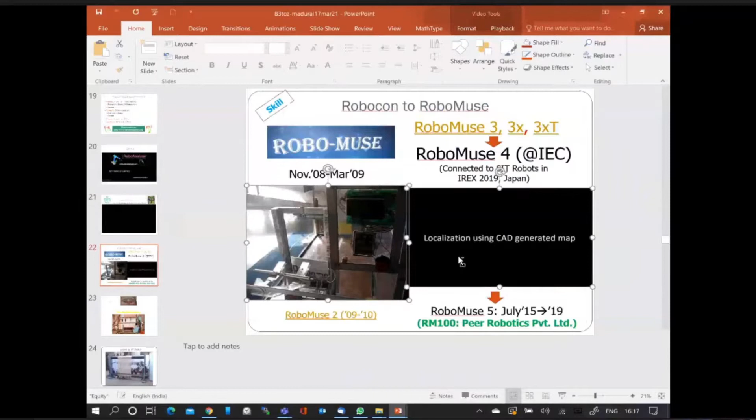These videos, things will not be interesting. This, I save it. This, okay, this one more. That's it. Yeah. Save.

Okay, done. Screen is visible. Am I right, Chetal? Yes, sir. Okay, Rajan, you are. I'm ready. Okay, so let's start. Good evening, everyone.

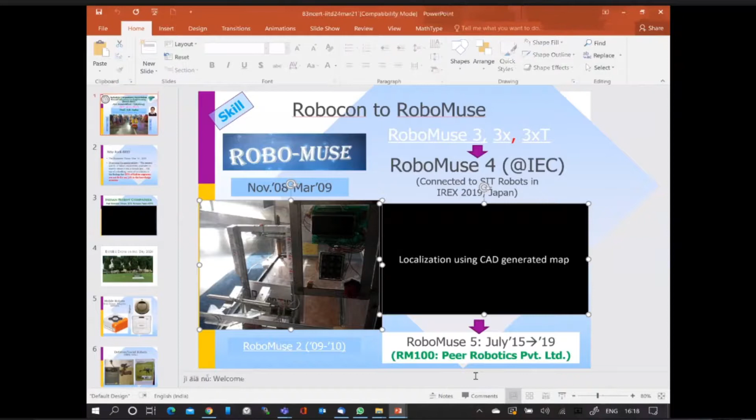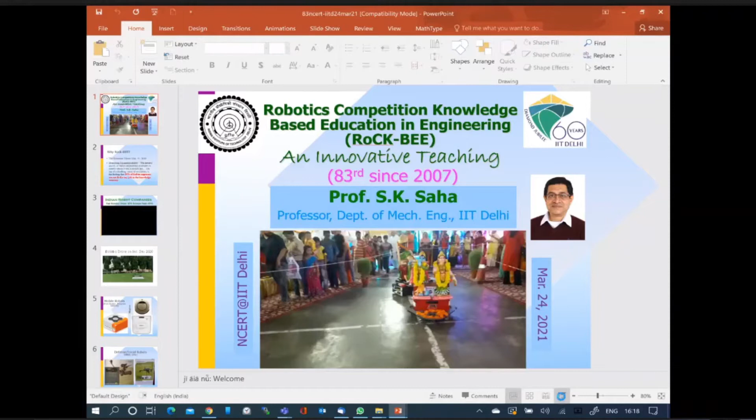Thank you, Rajan, and thanks for this opportunity. Thank you, all the students. I've been told that you are class 12, so you must be aspiring for JEE to come to us next year. But more than that, something I wanted to share with you: even in school, if you can make your studies more interesting—and in these next 20-25 minutes, I will try to explain how things can be made interesting.

My title is Robotic Competition Knowledge Based Education in Engineering. That means how you can take part in robotics competitions and have fun while learning at the same time. I call it innovative teaching approaches, whereas our conventional teaching approaches are the blackboard, whiteboard, LCD projectors, studying before the exam day and vomiting it in the exam papers the next day to get some grades. That's not a nice way of learning in my opinion.

So first I wanted to show you two robots which were built by our students over several years, and we put them on display during the Janmashtami festival of IIT Delhi in 2019. Just watch the first video.

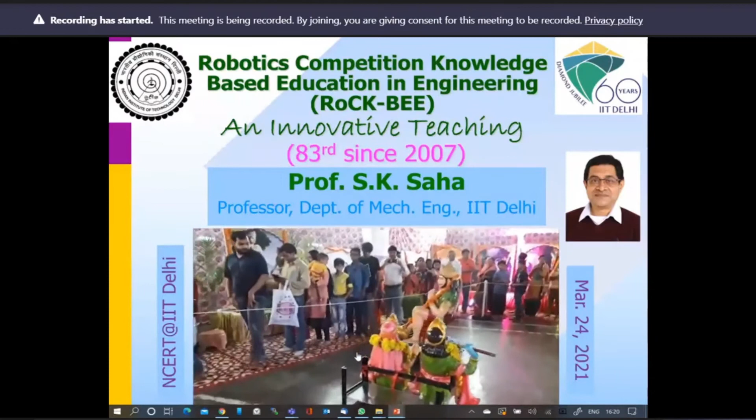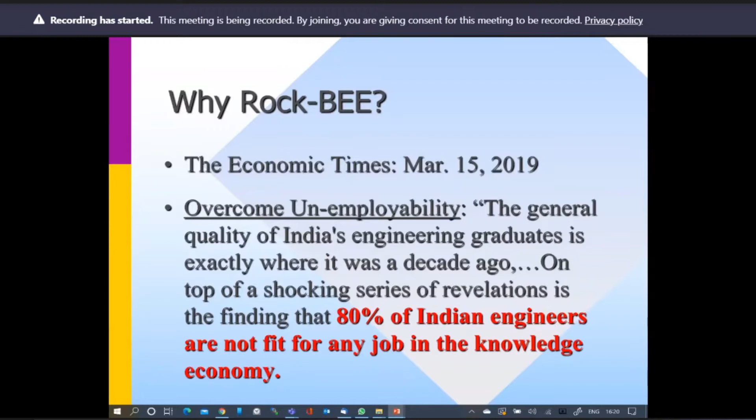You could see how well it pulled the crowd, and the basic purpose of this demonstration to the campus community here was twofold. One fold is whatever our students are doing—how reliable and robust are they? Do they get scared looking at the people? Actually, it is more than scared. If it is working for 5 hours, 10 hours, whether it will go bad or not.

That's one. The second thing is for the campus community—they would know that okay, if IIT is the premier institute and is doing so much advanced technology, which are those technologies, can I see them? So we wanted to bring it in front of them. In short, I call it RoCK-BEE—an innovative teaching concept.

And the purpose, I repeatedly tell these aspects—as you have seen, since 2007, almost 15 years ago, I started this series. And the reason is to overcome unemployability.

If you read this Economic Times, you can also see it in Google after my lecture: the general quality of India's engineering graduates is exactly where it was a decade ago. On top of that, a shocking revelation is the finding that 80% of Indian engineers are not fit for any job in the knowledge economy.

Now, India being one of the youngest countries in the world, if their engineers are not fit for jobs, then what will they do? So they will do lots of bad things. So we need to protect society from those.

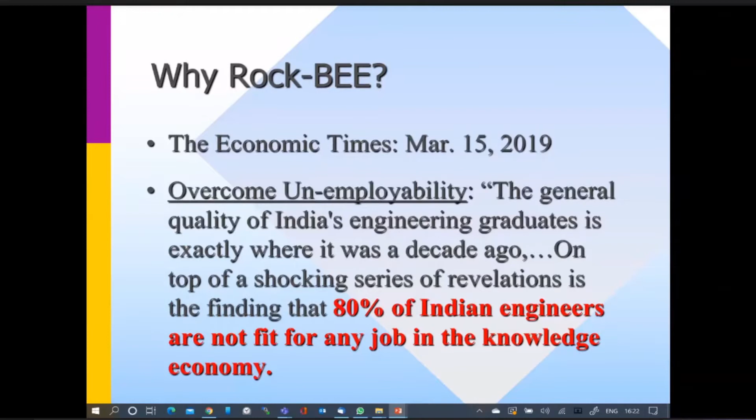So if, in my opinion, teaching has been made interesting by hands-on experiences, then even if they're bored with the job, they can always start a company on their own. So the first few slides will be full of Indian robot companies, because in India we are very fond of foreign products.

If I ask this question to all the students listening to me—what mobile do you use, is it made by an Indian company? Which car do your parents use, is it made by an Indian company? What refrigerator do you use at home, is it made by an Indian company? No—so most of the things you'll see, you buy foreign products, right?

Similarly, for Indian robot companies—because I know that if you want to know about robots, you will talk about Boston Dynamics, dancing robots and stuff like that, no? So we know everything other than ourselves. So here is an attempt to show some of the Indian companies.

Peer Robotics is a company started by our student, and the robot you'll just see is based on a competition IIT Delhi has been participating in, through a BTech final year project.

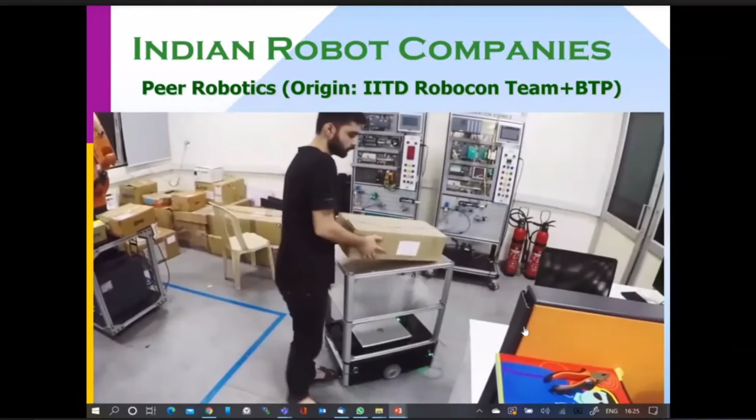So what you watched has 2-3 key points. One, it avoided obstacles on its own, that was autonomous mode, meaning the program was automatically getting executed. Second, it went to a station and stopped, and after that it expected interaction mode.

That means somebody gives some signal, presses a switch or something like that. You saw the student picking up a box, and after picking it up, giving a little push. That push indicated intention to the robot, the motors turned on and it started turning. At the end, when there was no activity around the robot, it came back to the original station.

All these things are done using what are called sensors, various sensors, and then the actuators, which are basically the motors. That was called collaborative robots.

A robot otherwise would be considered an autonomous robot, meaning once you do the programming, until the task ends no other action needs to be done. But here, during task execution, you can come and intervene. That's why it is called collaborative robots, and such robots are very much needed for the country because we don't have to displace human beings from the job. So collaborative robots are very important for the country.

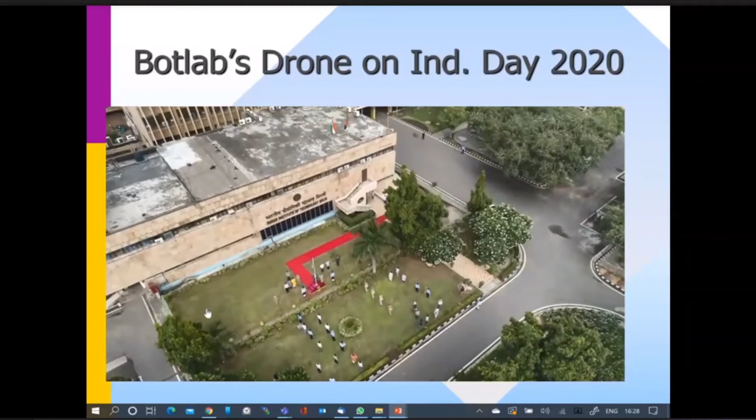What you saw is called the drone, another name is quadrotor because it has 4 rotors. Rotor means rotating shaft, so 4 blades rotating create what we call the lift force, so it can go up just like a helicopter, using similar principles.

Some more robot companies in the country: Grey Orange is very famous. When you order books on Amazon or Flipkart, a mobile robot like this is by Grey Orange. They go to different racks, read barcodes, and give the packet to the counter for dispatch.

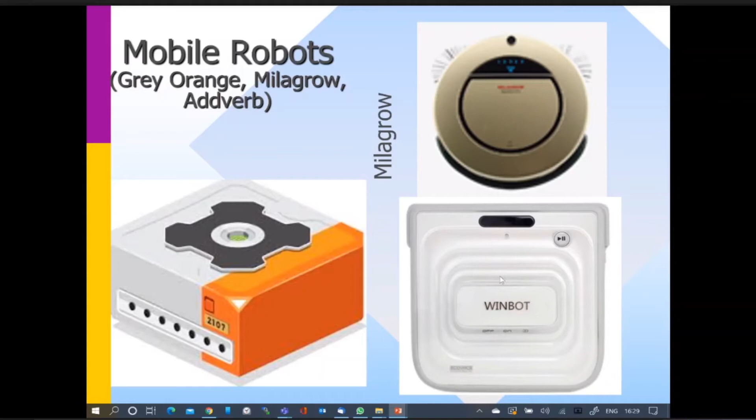Milagrow company makes a floor cleaning robot now for your mom, and this is a window cleaning robot for cleaning window panels in big high-rise offices.

There are defense robots too. For example, this is a bomb disposal robot made by the Defense Robotics Laboratory in Pune.

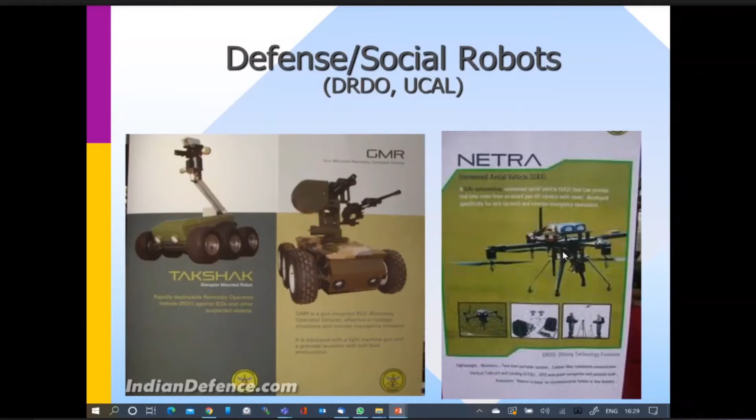This is another flying robot similar to the drone video you just saw. This company was created by students from IIT Bombay, and their first robot was shown in the 3 Idiots movie. The company's name is ideaForge.

These are called industrial robots, used in industry to pick and place certain objects. As you can see, some object is picked up and placed, or it does some welding job. This company's name is MTAB.

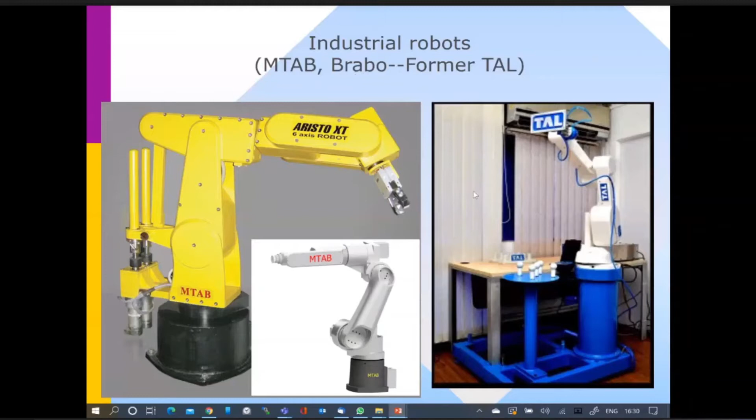It's a Chennai-based company, earlier called TAL. Now they call it Brabo. This is by the Tata Group.

There are other varieties of robots. As you can see, this is what we call a parallel robot, even though this platform is not exactly parallel, but somewhat parallel. These are called the legs, which push up and down at this edge, and the whole platform can take any rotation or translation. Flight simulators are based on similar principles.

This is by a company called Nugenix in Maharashtra, and the concept was developed by one of my ex-PhD students, who is now a faculty at ISM Dhanbad, which is also an IIT at present.

This is a walking robot made by another defense laboratory in Bengaluru, called the Center for Artificial Intelligence and Robotics.

This is an underwater robot, an autonomous underwater vehicle developed by the Central Mechanical Engineering Research Institute in Durgapur. It can go to 150 meters under the sea level, under the water level. The purpose of such a robot is to find out sea life, what kind of animal, and some resources if they're there. If some accident happens, it can find out what is stuck. This is another robot made by another company in Bengaluru, Systematics India Limited.

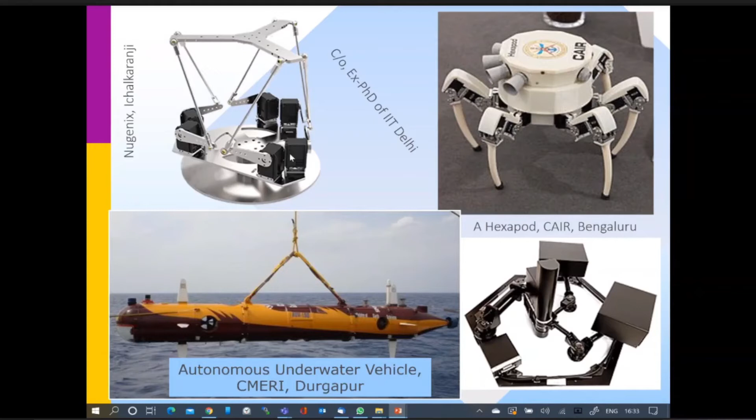Then dynamics, that means the relationship between force and motion. If you give this motion and want to move at a certain speed and acceleration, how much torque needs to be provided by the motor? That is the second part, dynamics.

Control means that any motion you provide to achieve a certain task will not just achieve itself - just like your parents controlling you. If they ask you to write a paragraph, you will write only half and say, oh, I'm done. So parents have to check whether you've done it or not, and apply more pressure. Similarly, the robot's controller does the same thing.

The last part is simulation and animation - without designing or building a robot, can you predict its behavior? During my session, after my lecture, there will be a real demo of a robot, and after that one student, Hetal, will show you a simulation. He has not built that robot, but he will show how a mobile robot used in a hospital environment can be simulated. That gives a good idea about how to plan.

Now, to study kinematics and dynamics, we have created software called RoboAnalyzer, which is free software. You can download it from www.roboanalyzer.com, and it lets you build your own robot.

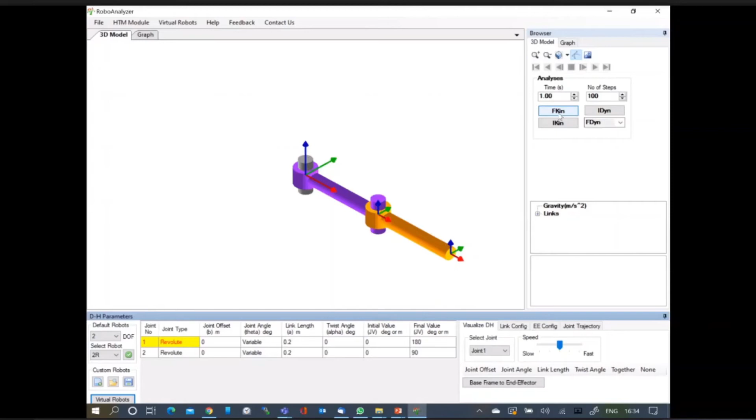For example, this is your arm, upper arm and lower arm, with some arbitrary values you can play with. Then you set the joint values - this is called a joint, this is called a joint - so move 0 to 180 degrees and 0 to 90 degrees, meaning this value ranges 0 to 180 and this one 0 to 90. Then I press something called the FKin, and once that's done, if you say animate, this is the way it moves. So you can build it and see what happens.

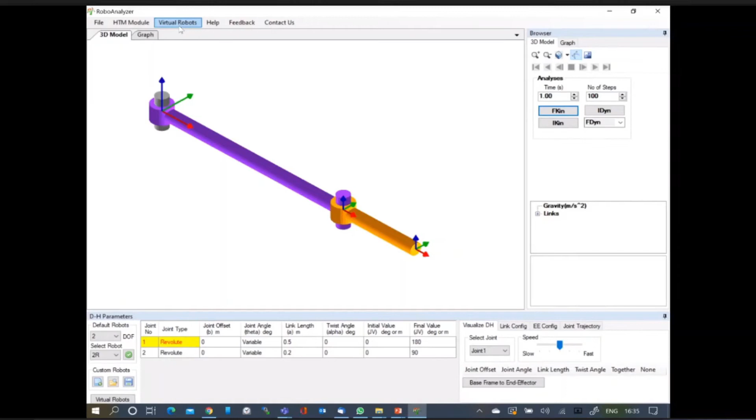So with values like 0.2 or 0.5, this arm got longer. That way one can play with many things, and there's something called virtual robot. The virtual robot feature is interesting because it shows about 16 or 17 industrially available robots. You can choose which robot you want, and then move it as if using a small box controller, like you do with toys - it's a virtual toy for you in a way.

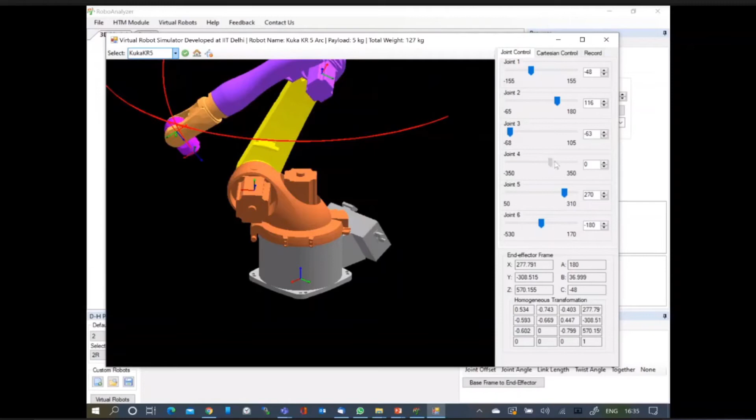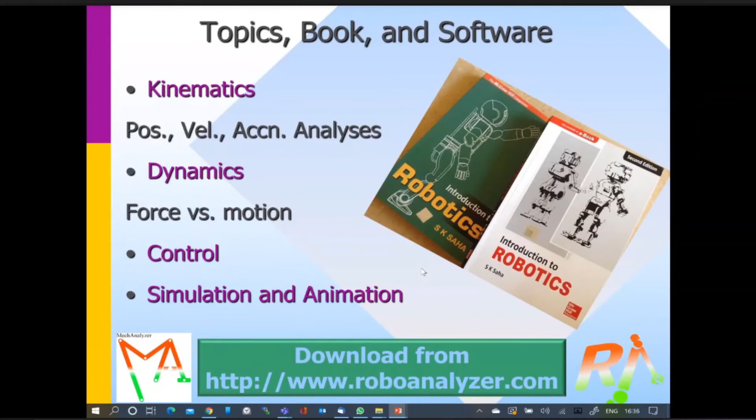Once you go to a higher level of studies, you will understand these things better. Now this is for robot structures, but there is something called MechAnalyzer, for mechanisms. All the machines you see in real life use some kind of mechanism like this - there are several examples, but let's look at some common ones you will find.

For example, there's the steering mechanism - in a car there is a steering mechanism, so you can play with how the car mechanism functions. You move the front wheel and see how things move. Then there's the wiper mechanism in your car - you have a wiper mechanism and can see how it functions.

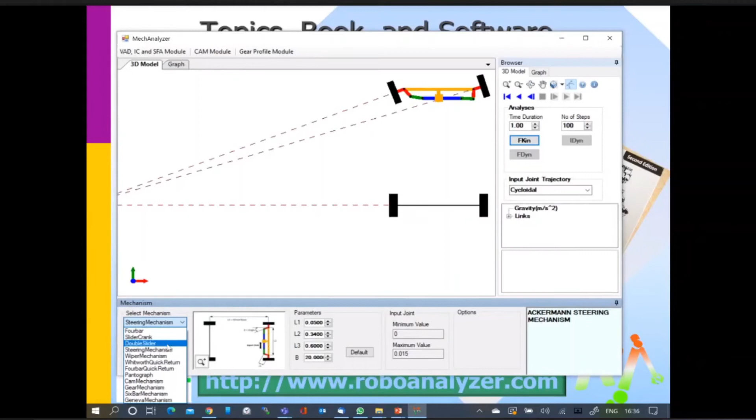Then you can go to the wiper mechanism in your car - you have a wiper mechanism and can see how it functions.

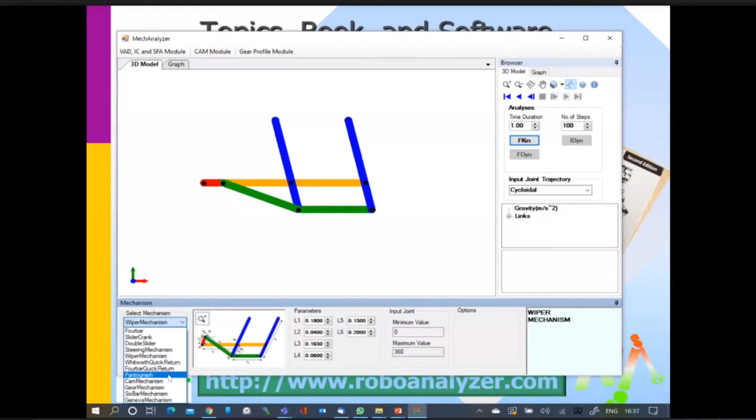These are examples mostly taught to undergraduate mechanical engineering students in a course called Theory of Machines. But some things, like the gear mechanism - when you start building a robot, even at school level, you come across using gears. So here you see how the gear mechanism works, and you can change some of the parameters.

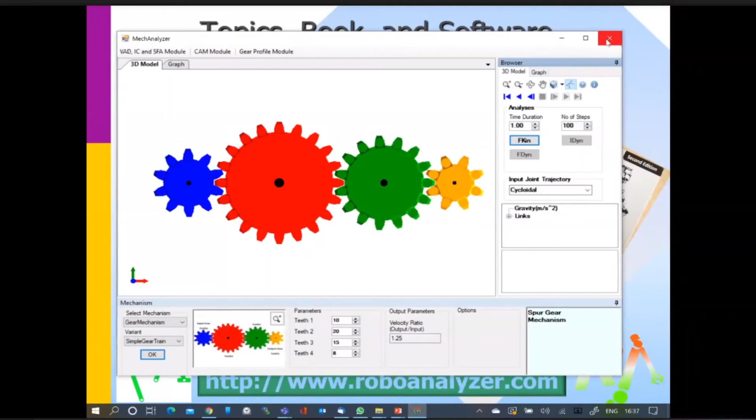There may be many such tools available on the internet, but I wanted to give you pride, to help you become proud Indians, so that you use more Indian goods, Indian software, Indian books, and so on.

Now I wanted to introduce a competition by participating in which you learn many things. This is called Robocon. It is held every year in India, organized by Doordarshan, and the winning team represents India in the international competition. It is only open for undergraduate engineering students. So this is 2019, what I'm going to show, and it was held at IIT Delhi.

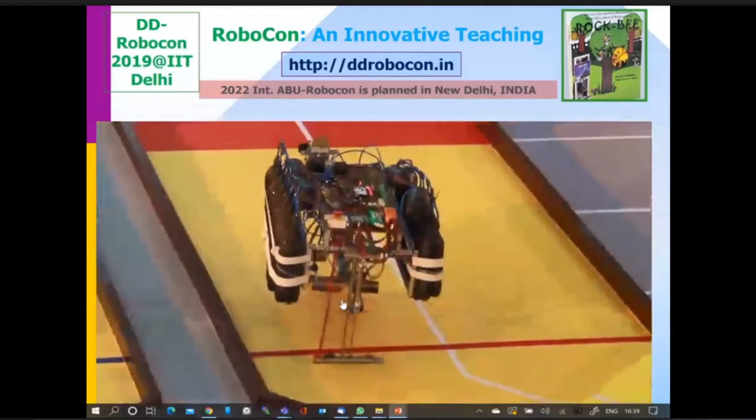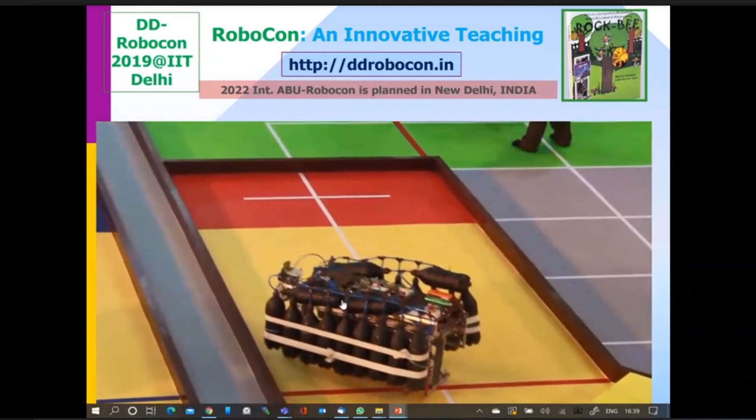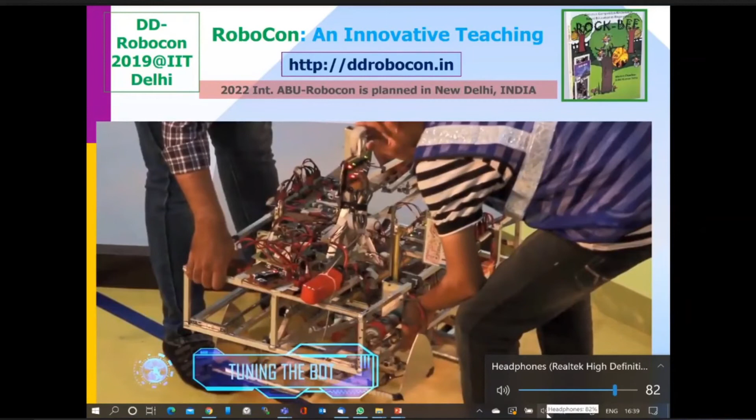What I'm going to tell you here is this book is called Rock-Bee, and it can be ordered online from pothi.com. It costs about 250 or so. There we share the experiences of our students taking part in this competition. This book is based on the story of the 2010 competition, about 10 years ago. It tells you the fun and the learning that goes on through participation and interacting with your friends and your professor, what you learn and what you don't learn. There are comments by students of class 8 and 10 who enjoyed it. So if you read and give feedback, it will be very good to us, to have a modified version in future.

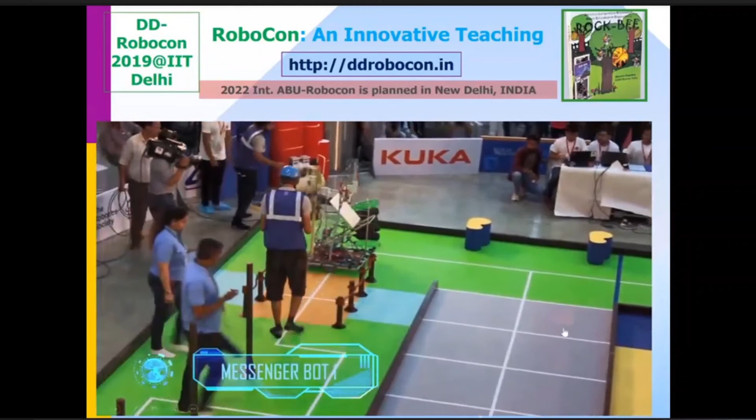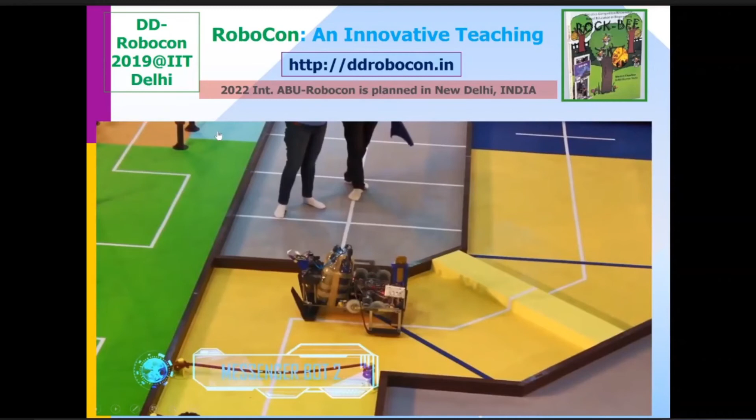In 2022, the international competition of this series will be held in India. The 2019 edition I have shown you is available on YouTube, you just have to search DD Robocon 19. The 2020 edition was held online, so those videos are also there, and this year it will be held on July 30th. For the time being, it has been planned.

After participating in such robotic competitions, it's great fun. But after that, it is important that our young budding engineers know how things should work in industry, which means a robot in a competition works for 3 minutes, but in an industry it is working continuously, day and night. So one has to know what is the reliability in these robots, or what is the robustness, meaning if somebody comes and pushes it a little bit, will it be completely broken?

So to test those things, that part of the skill, we started a series called RoboMuse, a robot for amusement. Actually, Muse is the name of a Greek goddess, and you can find out what that means. So this is the first version. Just watch.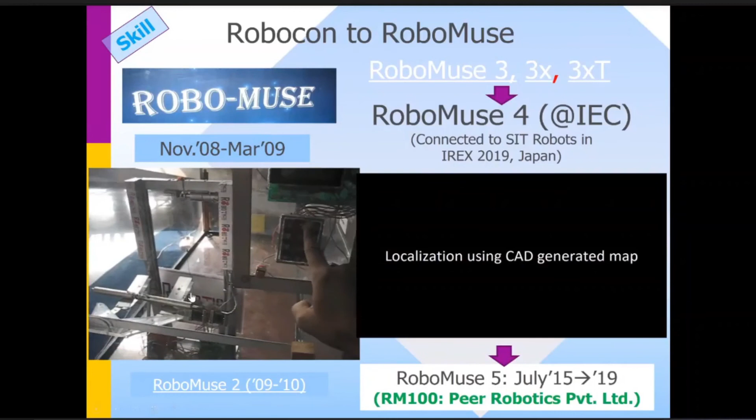Press the red button. Enter passcode. 1, 2, 3, 4, 5. Press red button again.

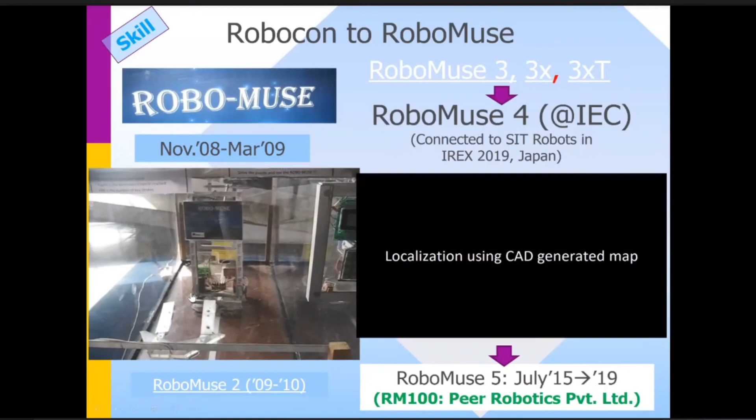This was in 2008 and 9. We put it in our student activity center, completely unattended, as you watched it actually. And by 2019, this became a product. So 11 years almost, right? This is important: whatever you do, you must wait 10 to 12 years in order to see certain useful outcomes for society. But in our style, we try to leave our domain every 2-3 years.

For example, when you are in school, you must be interested in physics. After 3 months, you go to do some chemistry. As far as learning is concerned, things are getting exposed anyway, but you have to slowly prepare towards what is your interest area. Not that school is the right time, but that attitude has to grow slowly in school and college, so that by the time you graduate and go into the workforce, you must be more or less deciding, okay, this is of my interest, maybe 1 or 2 at the most. Your attitude should be such that you become a good engineer or person that a company will come and give you the job.

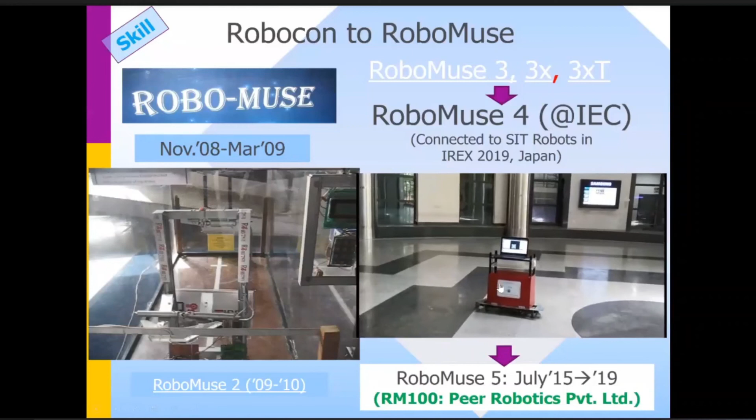This was used as an autonomous robot, no line following, and that too as a security surveillance in our lecture hall complex. We tested it, and that was RoboMuse 4, and the 5th one we have seen as the collaborative robot taken up by the company.

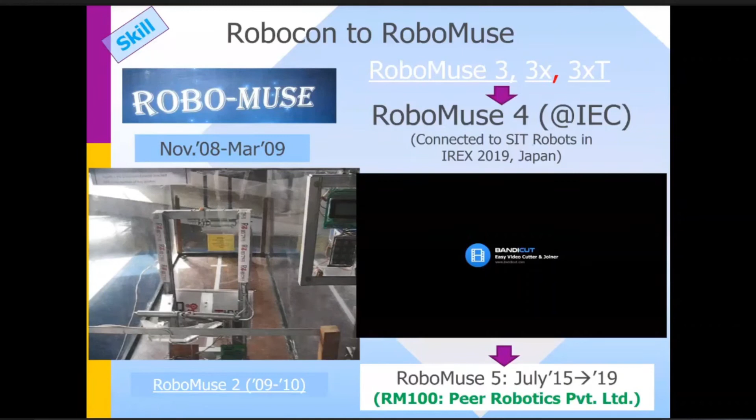With this, I come to the conclusion. I have shown you many Indian robot companies and how robot competitions can help as a fun robotic activity, and I have shown you RoboMuse projects, which finally yielded a product.